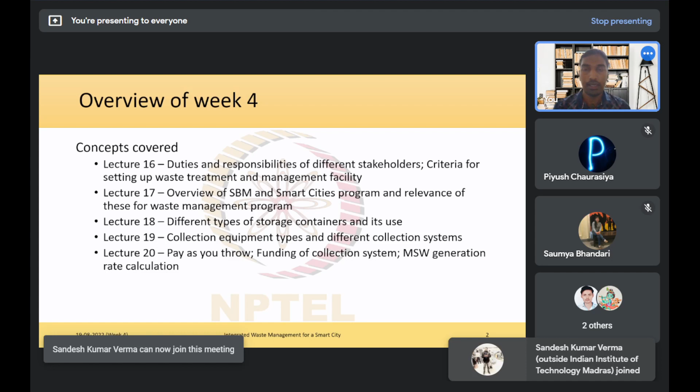And in the final lecture for week 4, we looked at different concepts such as pay as you throw, and also how we can fund the different collection systems. We also looked at one type of calculation for estimating how much waste will be generated from a particular area. So we looked at one numerical related to that at the end of lecture 20. So we will look at some questions related to these concepts.

So the first question is, which of the following is a duty of the Ministry of Urban Development according to the Solid Waste Management Rules of 2016? The options are: A, formulation of national policy and strategy on solid waste management, including policy on waste to energy. B, set up laboratories to test the quality of compost produced. C, ensure purchase of power generated from waste to energy plants by distribution companies. D, none of these.

Right. If you remember from the lectures on the duties of the different ministries, you will know that the answer is option A, because the Ministry of Urban Development is responsible for the formulation of the national policy and coming up with strategies for solid waste management, which also includes waste to energy. Whereas B, setting up laboratories for testing the compost quality, is actually the duty of the Ministry of Agriculture. And C, related to power generation from waste to energy plants, is the duty of the Ministry of Power. So the right answer is only option A.

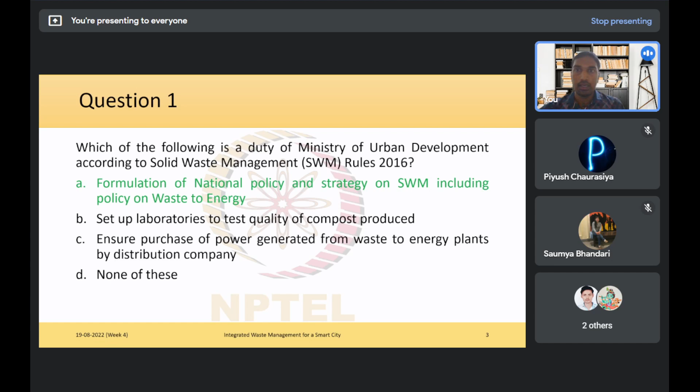Okay. Moving on to question number two. This is with respect to the solid waste generation rate that we saw in the last lecture of this week. In a given transfer station, recordings from observation scales for 2 consecutive weeks from a residential area are given as follows. In the first week we saw 10 truckloads, each having a volume of 20 cubic meters, and the total amount of waste brought in these 10 truckloads was 45,000 kilograms. In the following week we had 8 truckloads with the same volume, but the total weight was 35,000 kilograms.

And these wastes were brought from a residential area that had 3,000 homes, with 3 people on average per home. So the question is, what is the rate of solid waste generation in kilogram per capita per day? We have four options: 1.7 kilogram per capita per day, 1.3, 8.9, and 9. Before I solve it, I would like to encourage you to attempt this question by yourself, and once you try it, we'll see the solution.

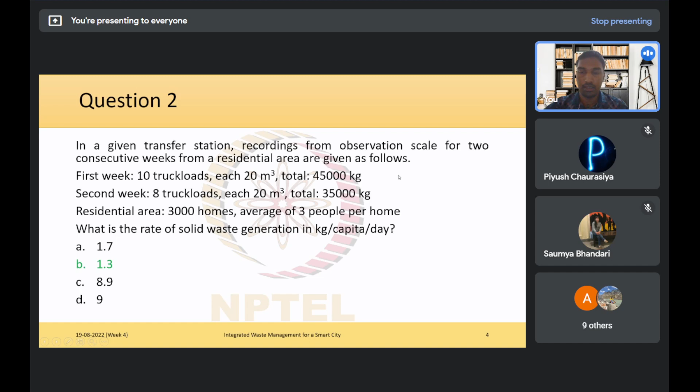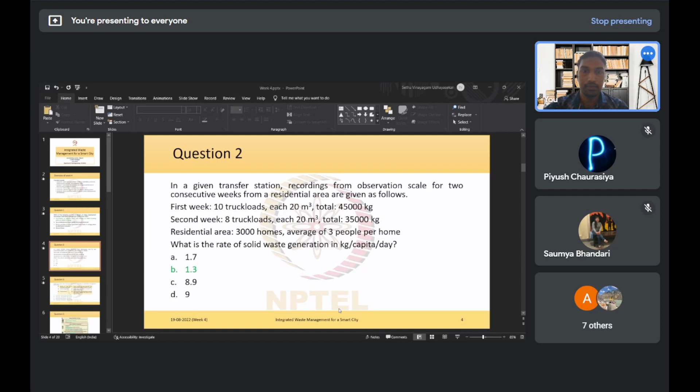Yeah, okay. So I had two answers, both saying option B, 1.3. So that is correct, B is the right answer. For those of you who could not solve it, I'll try to show how it is done. First we'll start with what information has been given to us. We are given, for 2 weeks, the amount of waste that has been brought to our transfer station, right? So first we will find the total quantity of waste that we have got.

In week one we got 45,000 kilograms, and in week two we got 35,000 kilograms, so that gives us a total of 80,000 kilograms. This is the total quantity of waste generated for 2 weeks. Then we also need to know the total population in the area from where this waste was collected. There are 3,000 households, and per household there are on average three people, so that gives us a total of 9,000 people in that particular residential area.

Now we want to know the rate of waste generation. It will be the total quantity of waste divided by the total population, which gives us the waste generated per capita. The total quantity is 80,000 kilograms, divided by the total population, 9,000. So what is the unit here? It is kilograms per capita per week.

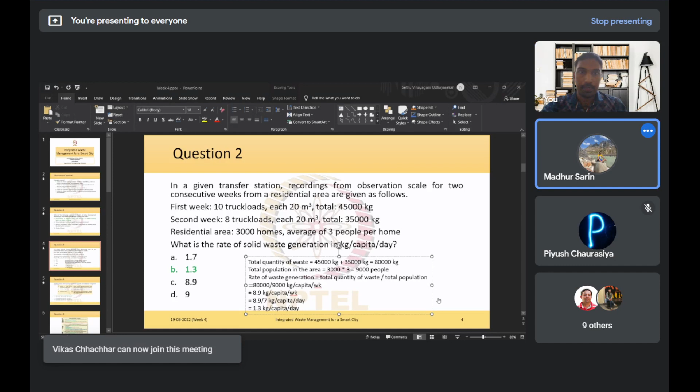Okay, so here is question 3. We have a table. In the first column we have the different ministries, and in the second column we have some of the duties for these ministries. We have to match the correct department with the correct duty. We have four options.

The ministries are the Ministry of New and Renewable Energy Source, the Ministry of Agriculture, and the Ministry of Power. The duties are: ensure the purchase of power generated from waste to energy plants by the distribution companies, provide appropriate subsidy or incentives for waste to energy plants, and ensure promotion of co-marketing of compost with chemical fertilizers in the ratio of 3 to 4 bags to 6 to 7 bags.

If you remember from the lecture, for the Ministry of New and Renewable Energy Source, the duty is to provide appropriate subsidy or incentives for the waste to energy plants. For the Ministry of Agriculture, it is to ensure the promotion of co-marketing of compost. And for the Ministry of Power, it is to ensure the purchase of power generated from these waste to energy plants. So the correct match is given in option A: New and Renewable Energy is 2, Agriculture is 3, and Power is 1.

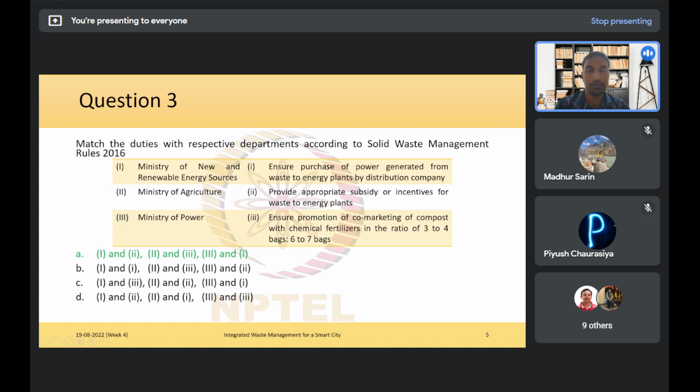Other duties: the Ministry of Power will also have to decide the tariff for the power generated from these waste to energy plants. The Ministry of Agriculture will also have to provide flexibility in the fertilizer control order, propagate the utilization of compost on farmlands, and set up laboratories to test the quality of the compost. And the Ministry of New and Renewable Energy Source will also have to facilitate infrastructure creation in addition to providing subsidies. Okay, so with that, we'll move to question 4.

Here we have again three different departments, and we have to match them with the deadline or review period for implementing the rules at the various levels. First, the district collector to review the performance of the local authority. Then the Ministry of Environment, Forest and Climate Change for the Central Monitoring Committee. And then the Secretary in charge of urban development for the state level advisory committee. We have three options: yearly, half yearly, and quarterly.

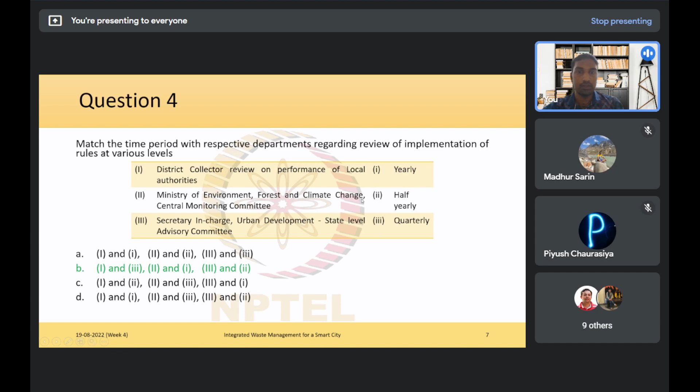So if we again remember from our lectures, for the district collector to review the performance of local authorities, it should be done at a quarterly period. For the Ministry of Environment, Forest and Climate Change, it should be done at a yearly level. And for the state secretary in charge, it will be done at a half yearly period, right? So the correct match is given in option B: 1 with 3, 2 with 1, and 3 with 2. So this is from the lecture, right?

Right. Okay. So question 5 is, which of the following waste should be considered for waste to energy process? Option A is recyclable waste with a calorific value of 1500 kilocalories per kg. B is non-recyclable waste with a calorific value of 1500 kilocalories per kg. And C and D are recyclable and non-recyclable waste respectively with 500 kilocalories per kg. Which of these should be used for waste to energy process according to the Solid Waste Management Rules of 2016?

Okay, so we have an answer B. Any other answers? It is B, sir, non-recyclable waste having calorific value of more than 1500 kilocalories per kg. Yeah, so B is the right answer. The Solid Waste Management Rules specify that only non-recyclable waste with 1500 or more kilocalories per kg should be used for waste to energy processes, right?

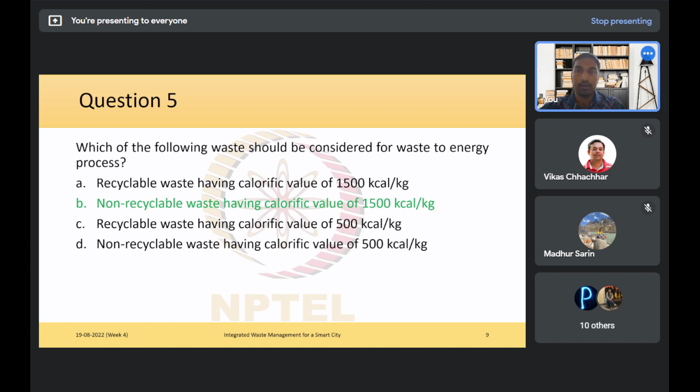All right. So question number seven: which of the following is not an objective of the Swachh Bharat mission? We have four options: promote landfilling for all types of municipal solid waste, generate awareness about sanitation and its linkage with public health, modern and scientific municipal solid waste management, and the elimination of open defecation. It is A, promote landfill for all types of municipal solid waste. Yeah, so it is option A. That is not an objective.

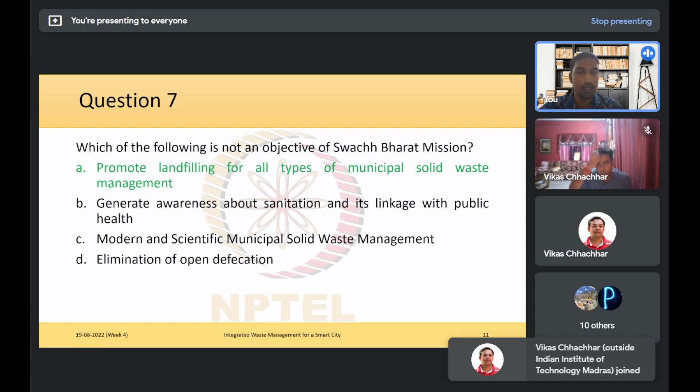We need to create public awareness about sanitation and how it's going to affect public health. And we also want to practice modern and scientific processes for municipal solid waste and eliminate open defecation in the country, right?

Question 9. Which are the criteria and actions that can be taken for solid waste management in the hilly areas? So from now on, we will be dealing with multiple select questions, where more than one option could be correct. So the options are: construction of the landfill on the hill shall be preferred. Transfer station should be constructed at suitable enclosed locations for collection of residual and inert waste. Step garden system may be adopted for optimum utilization of the hill space, and suitable space shall be allocated for setting up of decentralized waste processing facility. So which of these are the correct criteria and actions with respect to hilly areas?

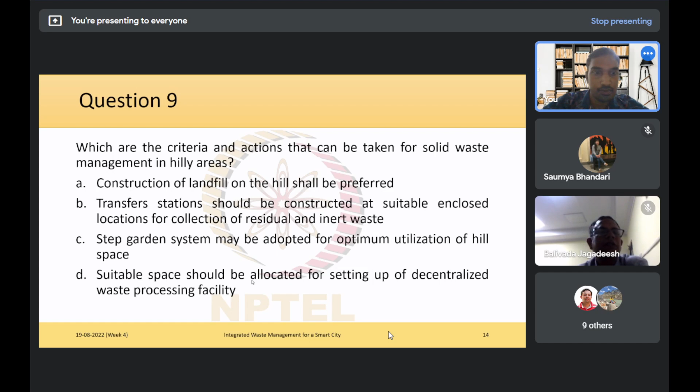It is D. Suitable space should be allocated for setting up the decentralized waste processing facility. Okay. Do you think anything else? Any other option could be correct? So C and D. Yeah, C and D. Step garden system. Okay. All right. We have quite a few answers saying B, C, and D. So in fact, all those three options B, C, and D are correct. So again, recall from our lecture. So all these three are different actions that are suitable, are required to be taken for managing the solid waste in the hilly areas.

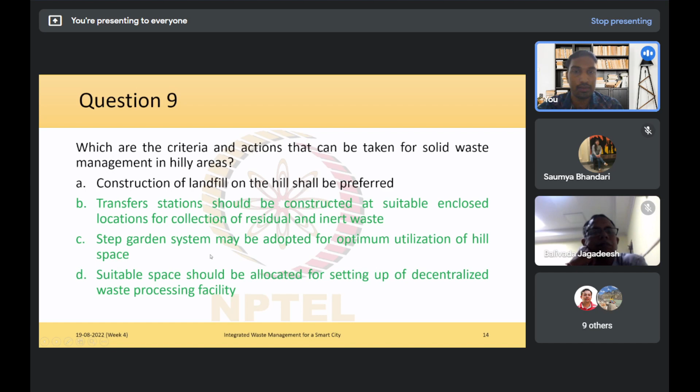But we won't go for landfilling in the hilly areas, right? It's not preferred because it's very difficult to construct landfills on the hilly terrains, right? So we have to find land. Also, we don't want to contaminate those areas, right? So we do not prefer to construct landfills in hills. So we'll set up transfer stations, or we'll go for step garden systems, or decentralized processing facilities.

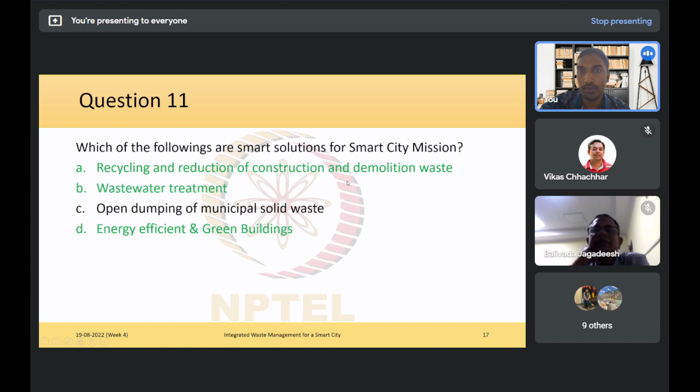Okay, A, B, and D. Yeah. So as most of you have correctly said, it is A, B, and D, right? So C is not a solution, not just a smart solution. It's not a solution at all for solid waste. We don't want to do open dumping, right? So that's not preferred at all, and also obviously it's not a smart solution. So all three, A, B, and D, are actually part of smart solutions laid out for the smart city mission.

Okay, so question 12, which of the following statements are true for the pay as you throw concept? So we have two different ways in which we could charge the users, right? One is weight based, and the other is volume based. Option A is, volume based service provides less incentive to reduce the waste. B is weight based service provides less incentive to reduce the waste. C and D are with respect to the cost. C, volume based service is more expensive. D, weight based service is more expensive.